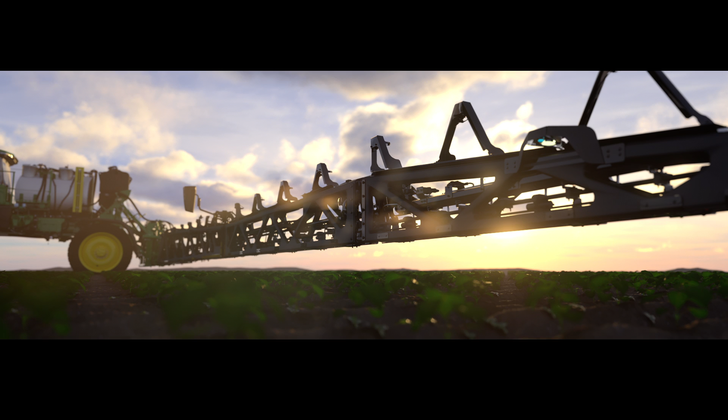With a new boom engineered with a truss-style carbon fiber design and BoomTrac Ultimate, which is an even better boom height control system, the boom provides the stability and strength to support the computer vision system and onboard processors critical to achieving highly precise application performance at application speeds up to 12 miles per hour. How does it come to life?

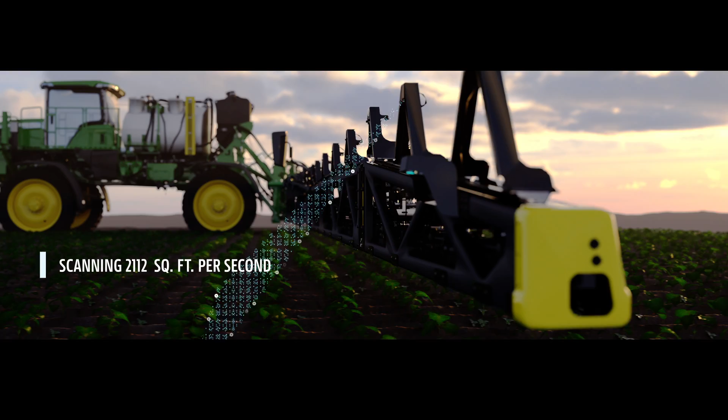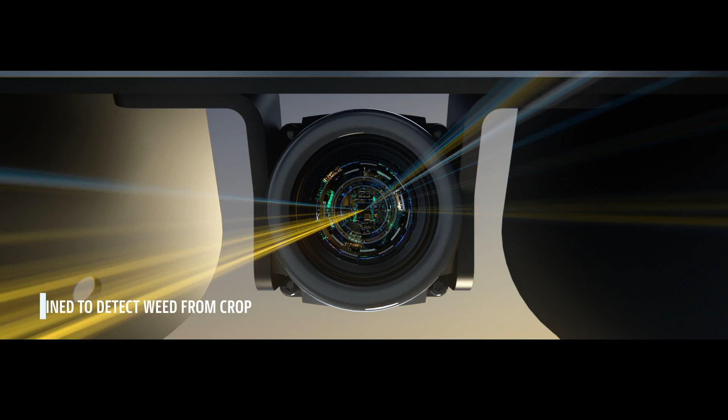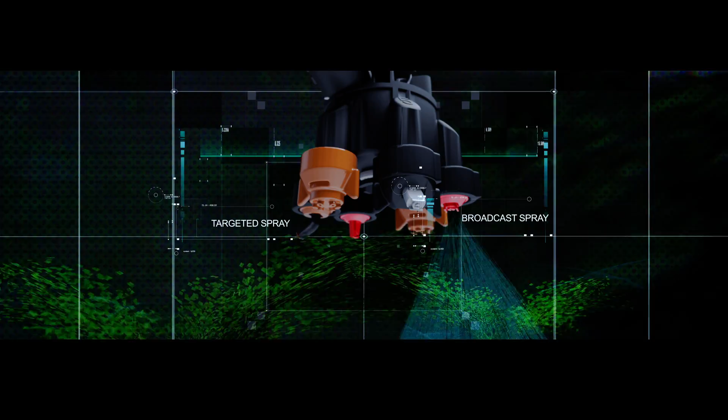36 cameras are installed along the 120-foot boom, continuously scanning 2,112 square feet per second for weeds. The cameras provide high-resolution images to graphic processors with machine learning models trained to detect weeds from crop. When a weed is detected, the processor sends a command to the ExactApply nozzle technology to activate the appropriate number of nozzles to achieve the necessary coverage. That means in 1/3 of the time you blink, this smart sprayer saw, decided, and delivered on 100,000 plants.

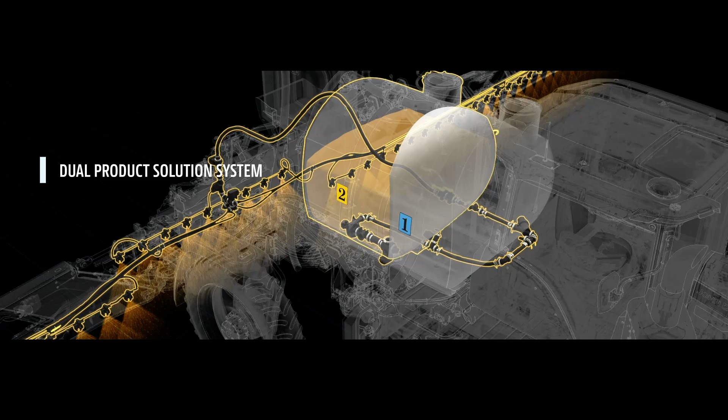To provide farmers flexibility to best manage weeds, the sprayer is equipped with a dual product solution system. Operators can select from different spray modes, with the following being the most popular. Targeted spray allows an operator to reduce non-residual herbicide usage with less tendering, allowing for increased productivity.

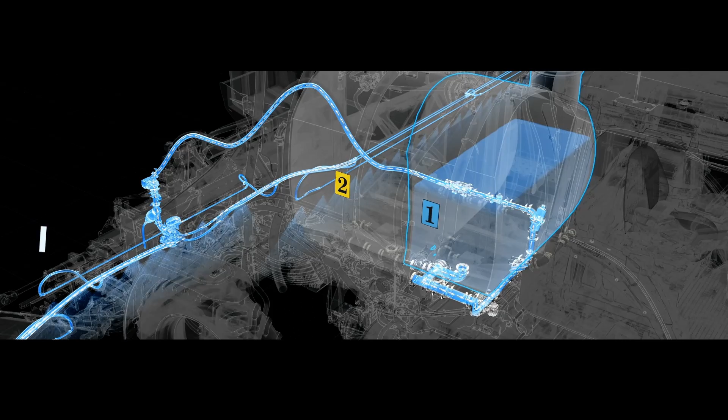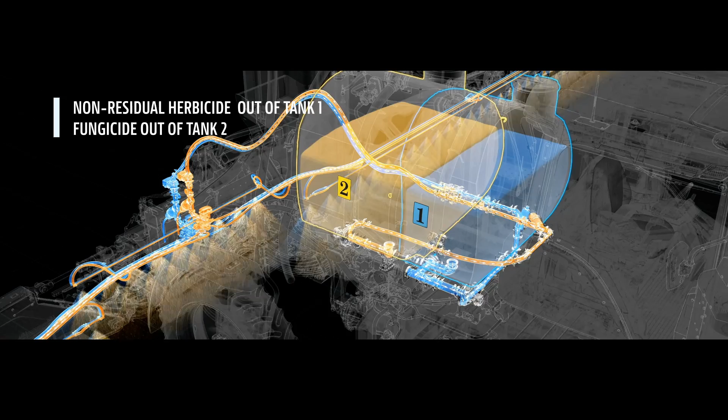Next is broadcast and targeted spray mode, which allows for more aggressive application due to avoiding tank antagonism to better combat herbicide resistance, or allows for two traditional unique passes to be combined into one. For example, non-residual herbicide out of tank 1 and fungicide out of tank 2.

Next is single product high flow mode. In this mode, tank 1 and tank 2 flow through two spray pumps into both A nozzle and B nozzle, reaching a combined high flow spray rate of 200 gallons per minute, which can be beneficial in applying liquid fertilizer at a higher rate.

See & Spray Ultimate is offered at one combined factory install option on John Deere 410R, 412R, and 612R self-propelled sprayers, including a 120-foot boom with targeted spray and a dual product solution system with two tank sizes to maximize farmers' ability to control weeds and cover acres. The system operates in soybean, corn, and cotton crop with 30-inch or greater row spacing, as well as on fallow ground.